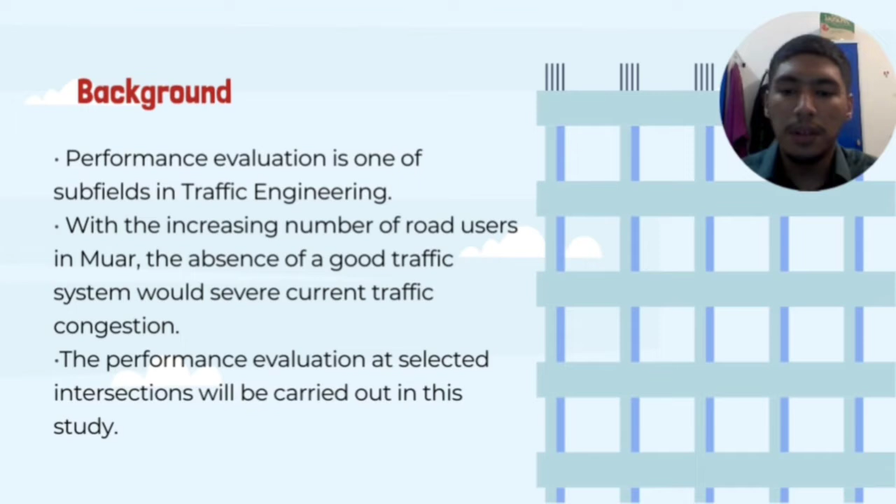Our background study is the performance evaluation is one of subfield in traffic engineering. With the increasing number of road users in Muar, the absence of a good traffic system will severe current traffic congestion. The performance evaluation at selected intersection will be carried out in the study.

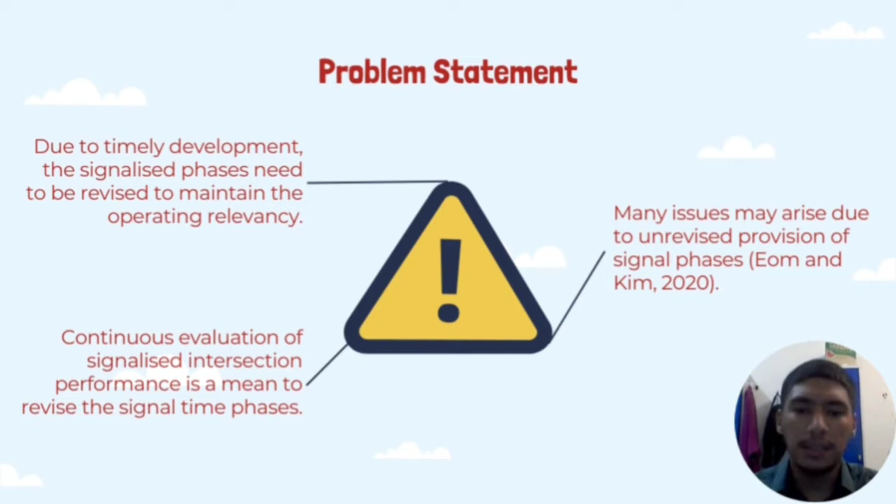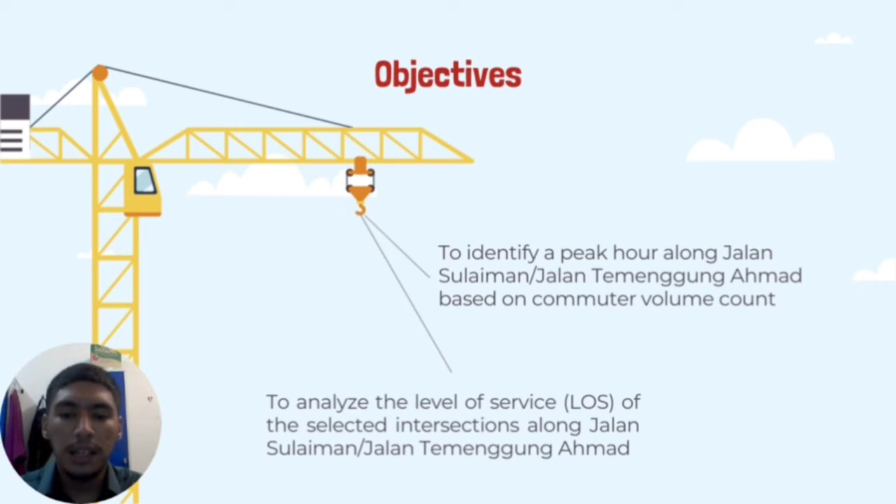Our objective is to identify a peak hour along Jalan Sulaiman/Jalan Temenggung Ahmad based on commuter volume count, and also to analyze the level of service of the selected intersection along Jalan Sulaiman, Jalan Temenggung Ahmad.

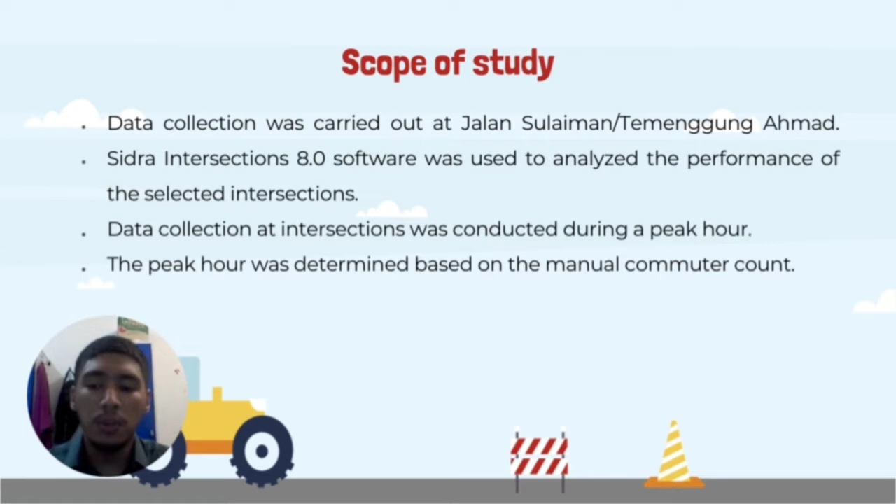Our expected outcome is peak hour for Jalan Sulaiman and Jalan Temenggung Ahmad will be obtained by using commuter count, and the LOS or level of service at the selected intersection will be determined.

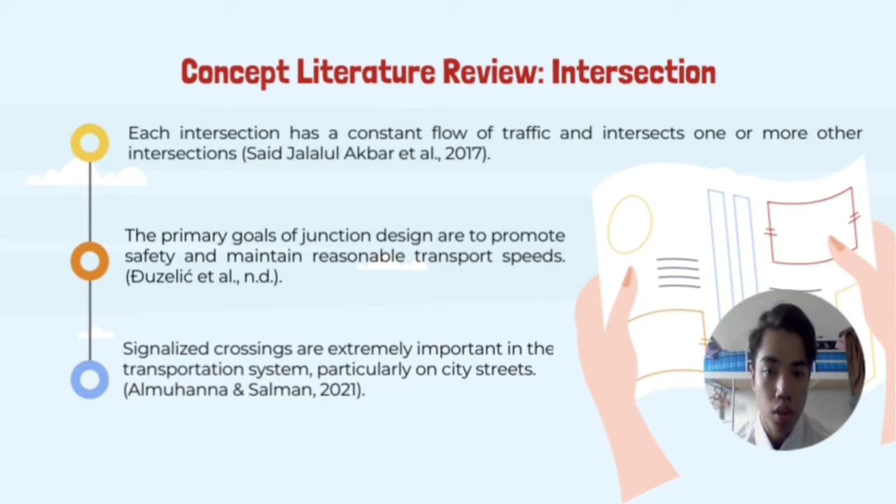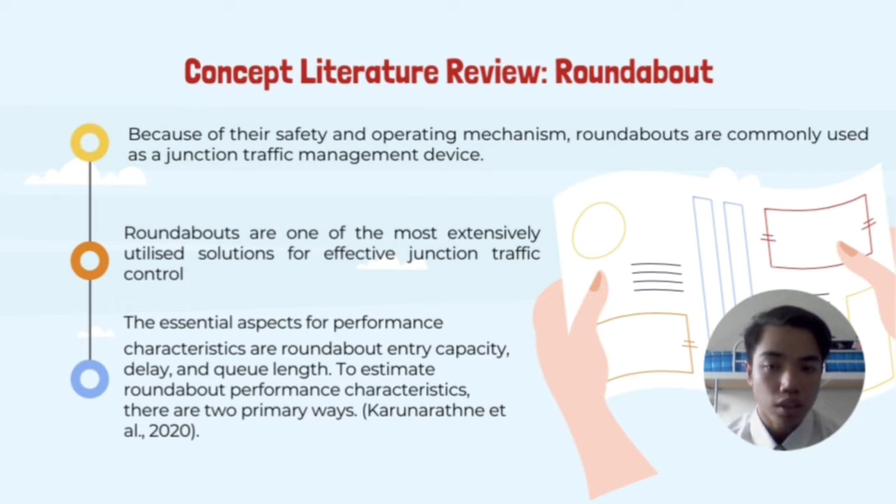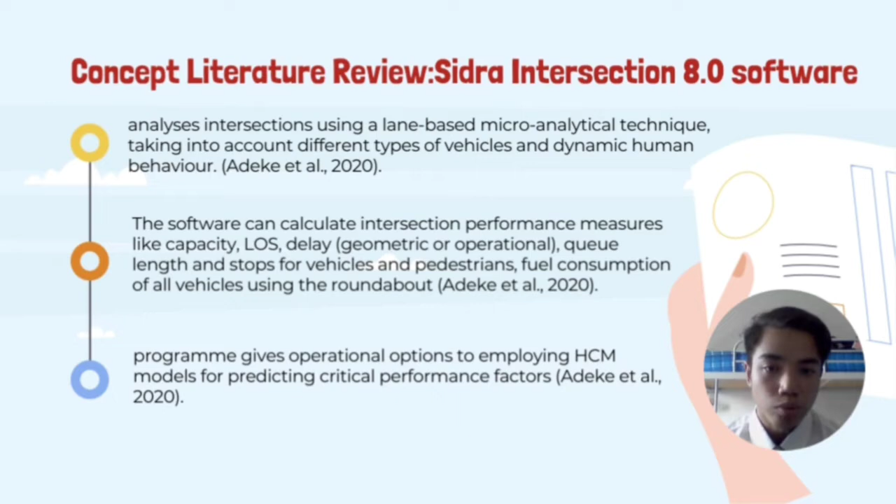So for the unmanned aerial vehicle, a powered aerial vehicle that does not contain a human operator employs aerodynamic force to create vehicle lift and may fly autonomously. The name comes from the military, which is unmanned aerial vehicle, UAV.

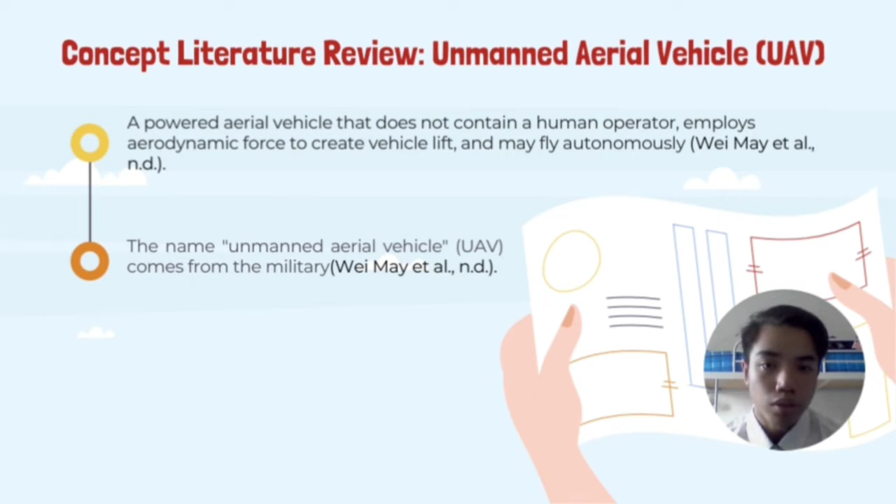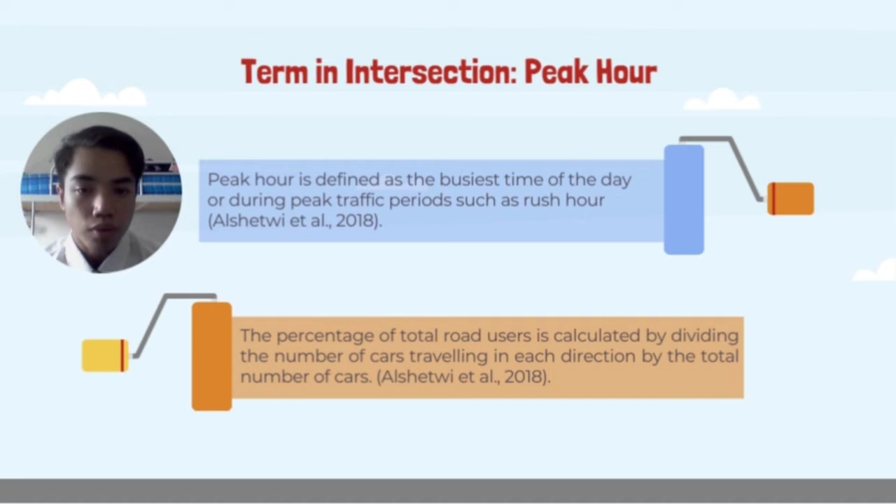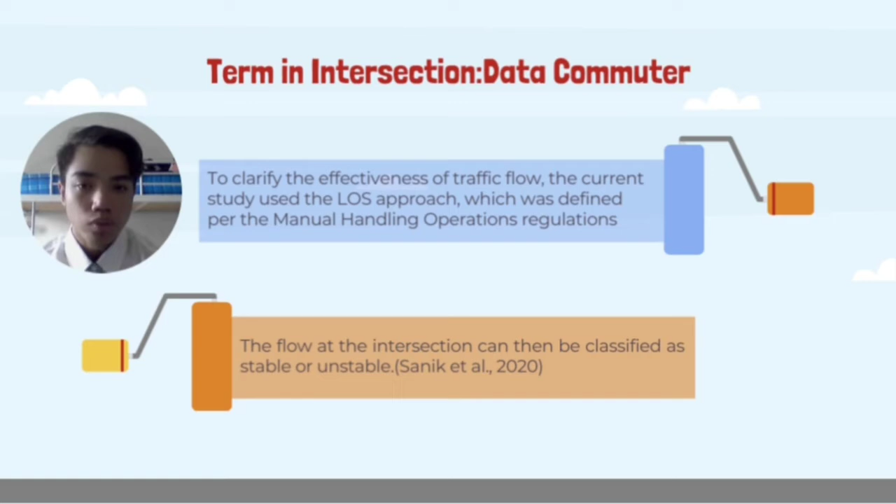So now we move on to terms in intersection, peak hour. Peak hour is defined as the busiest time, and the formula of the peak hour is dividing the number of cars traveling in each direction by the total number of cars. The next term in intersection is data commuter. To clarify the effectiveness of traffic flow, the current study used the LOS approach, and the flow at the intersection can then be classified as stable or unstable.

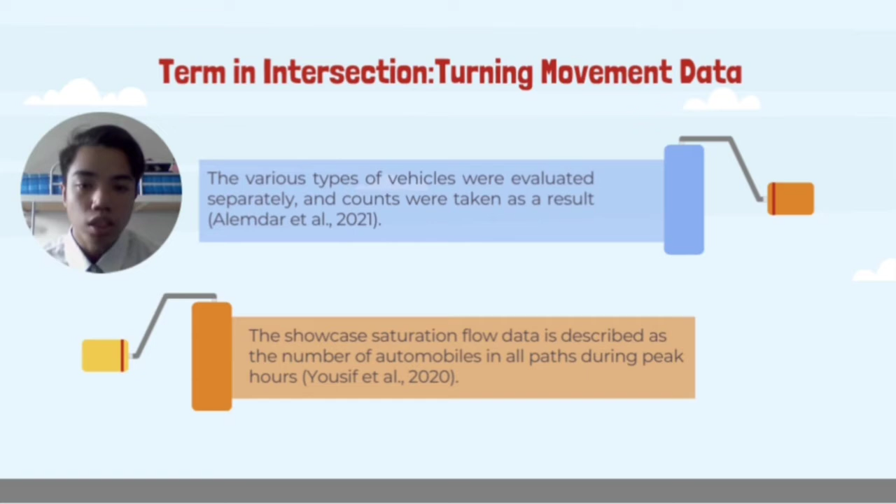So we move to turning movement data. Turning movement data is the various types of vehicles were evaluated separately and counts were taken as a result. The saturation flow data is described as the number of automobiles in all paths during peak hours.

So for green light duration, during green light duration, conflicting traffic might arrive from either the intersecting approach or the opposing approach. Other than that, the real green light duration was estimated using the variance or slab technique.

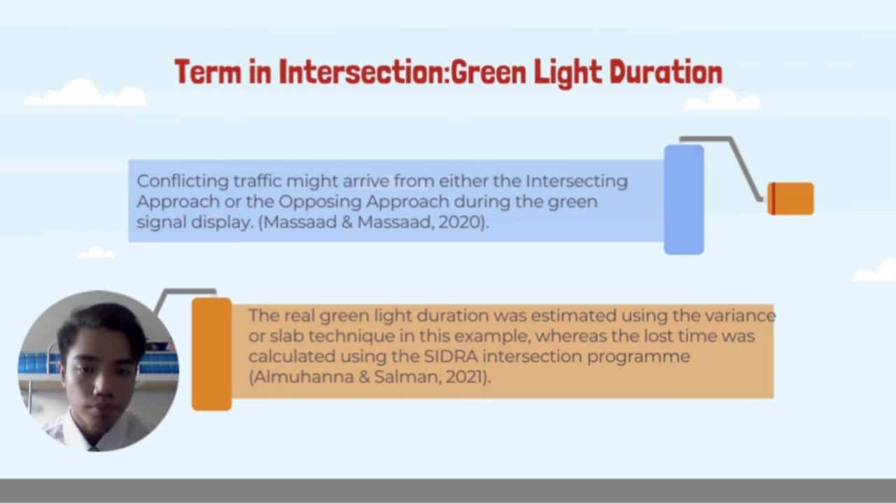The last term in intersection is LOS. LOS is used to dissect highways by sorting traffic flow and allocating quality levels of movement based on execution metrics such as speed and density.

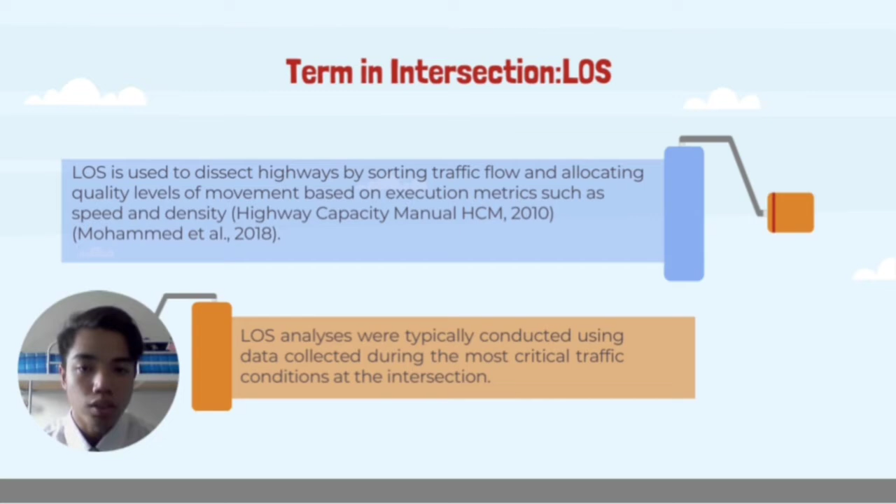Other than that, LOS analysis were typically conducted using data collected during the most critical traffic condition at the intersection.

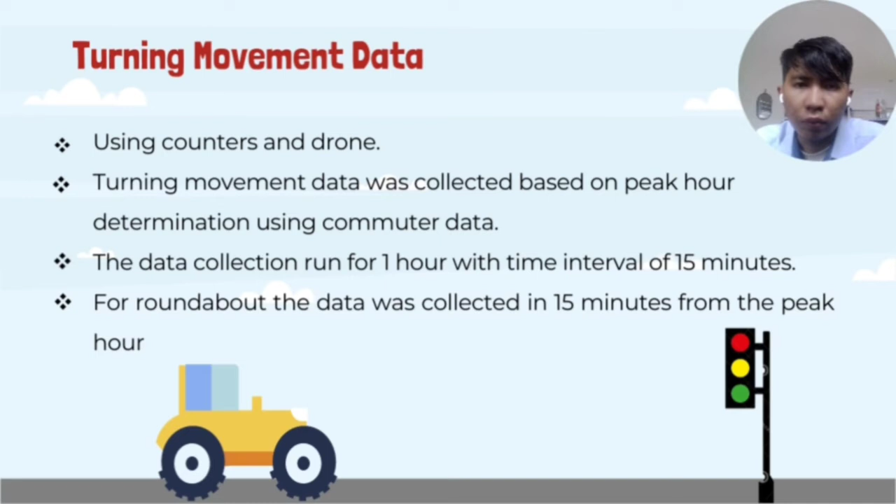Turning movement data. For the turning movement data, we are using a counter to collect the data at the selected intersection, while drone to collect data at the roundabout. Turning movement data was collected based on the peak hour. The data collection will run for 1 hour with time interval of 15 minutes for the signal intersection. For the roundabout, we collect the data in 15 minutes from the peak hour.

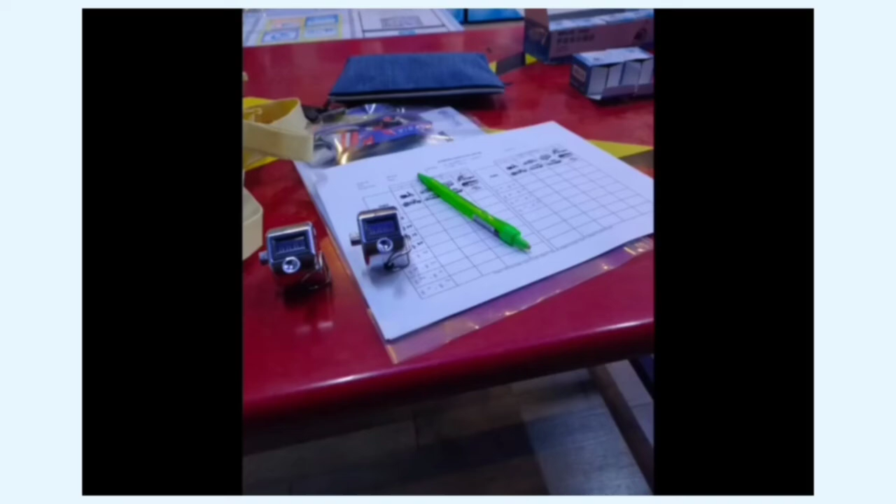Data analysis method also have 2 parts, that is commuter analysis and turning movement analysis. Commuter analysis, the function is to know the peak hour at the selected road, and we are using Microsoft Excel to combine all the data that we collect. The type of this analysis is time series plotting.

Turning movement analysis, the function is to know the volume vehicle for 4 classes at the intersection that is chosen, and we are using SIDRA Intersection 8.0 software to know the level of service. The type of the analysis is US Highway Capacity Manual.

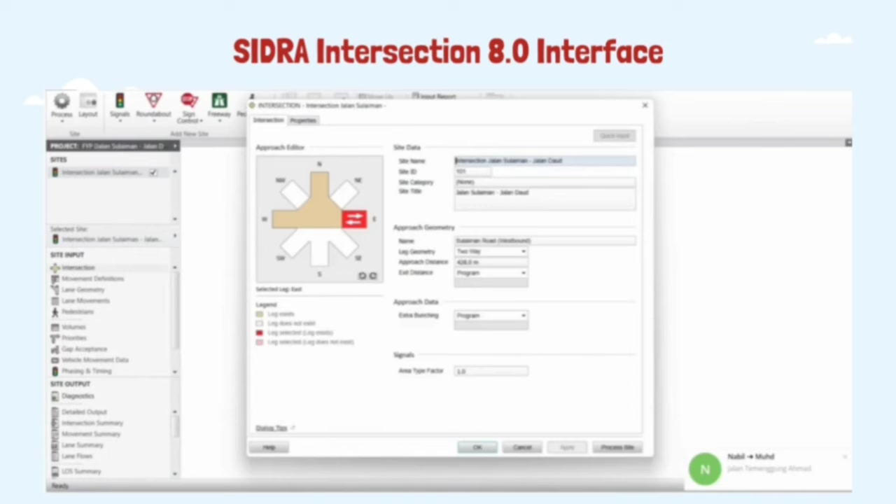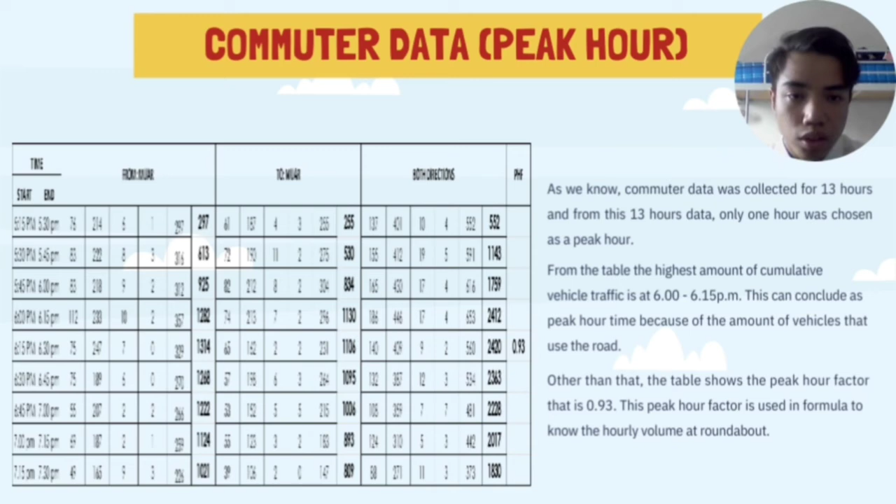So we move to commuter data peak hour. Commuter data were conducted 13 hours and just 1 hour will be chosen as a peak hour. So from the table, we can see that 6 to 6:15 p.m. is the highest amount of cumulative vehicle traffic. Other than that, the table shows the peak hour factor that is 0.93. This peak hour factor is used in formula to know the hourly volume at roundabout.

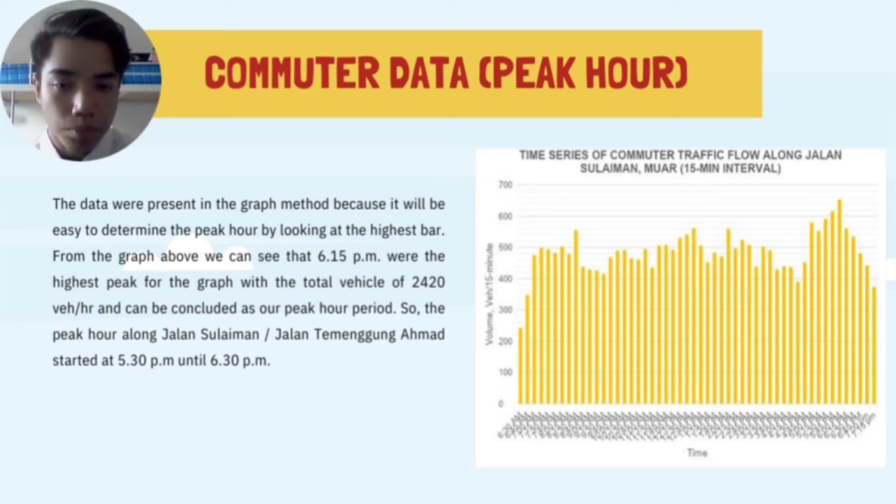So for the further explanation of commuter data, the data will present in graph method because it will be easy to determine the highest bar. From the graph, we can see that 6:15 p.m. were the highest peak for the graph with total vehicle of 2,420 vehicle per hour. So the peak hour along Jalan Sulaiman, Jalan Temenggung Ahmad started at 5:30 p.m. until 6:30 p.m.

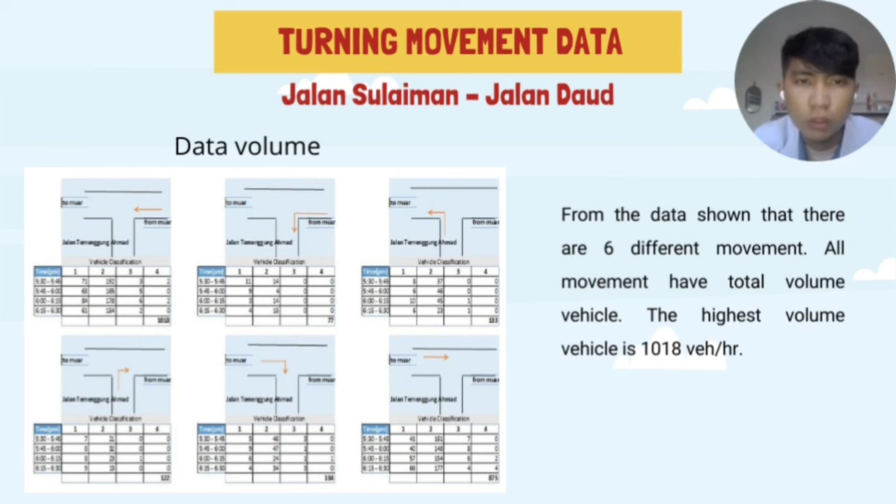Turning movement data at Jalan Sulaiman, Jalan Daud. From the data, there are 6 different movement. All movement have their own total volume vehicle. The highest volume vehicle for this route is 1018 vehicle per hour. That is the movement straight from Muar.

Turning movement data at roundabout Jalan Sulaiman. From the data, we see they have 20 different movement, and every movement have their total volume vehicle for 15 minutes. As we know, the data for the roundabout was taken for 15 minutes only. So to know the hourly volume, they have a formula. That is 4 times the peak hour factor times the volume vehicle for 15 minutes.

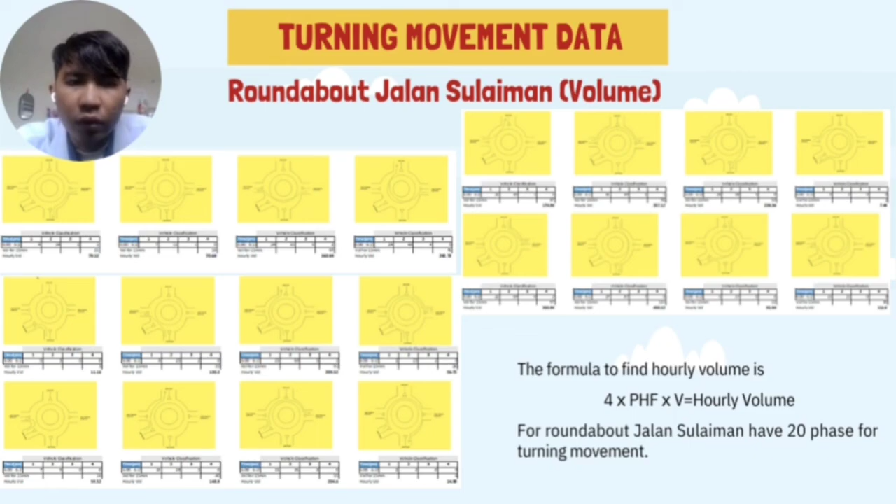For Jalan Sulaiman, Jalan Daud, there is 2 lane that has LOS F, 3 lane that has LOS D, and 1 lane that has LOS C. While Jalan Temenggung Ahmad and Tunku Bendahara, there is 4 lane LOS F, 1 lane LOS E, and also 2 lane LOS C. While roundabout at Jalan Sulaiman has 4 lane LOS F and 1 lane LOS E.

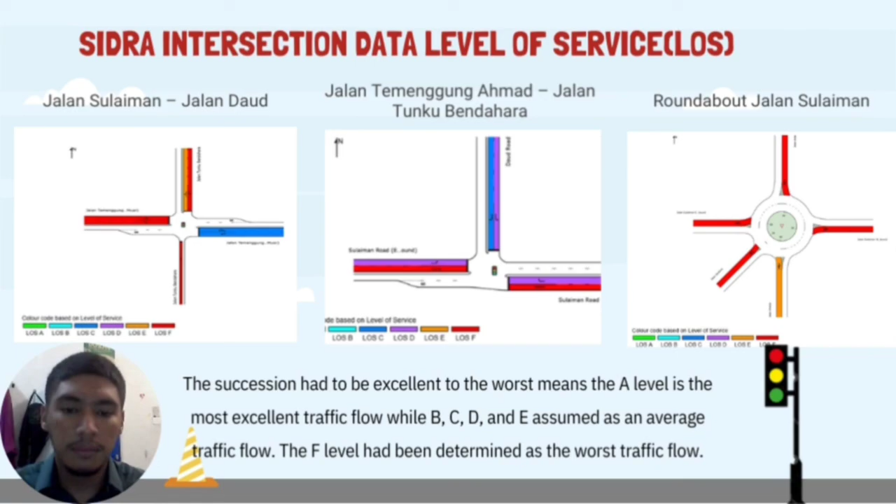So the conclusion is the peak hour and level of service along Jalan Sulaiman, Jalan Temenggung Ahmad is the worst, and it made this road the busiest road at the peak hour. So for our recommendation, the government can spend some money to build a flyover which can help to fix the traffic flow issue drastically.